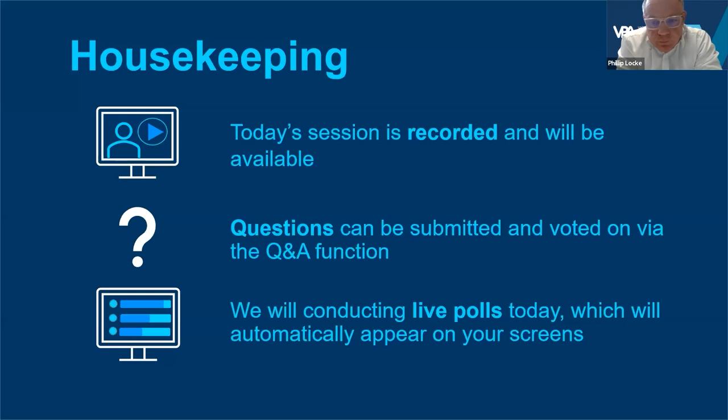The purpose of this webinar is to highlight the most common inquiries and faults relating to box gutter systems that are not being designed in a deemed to satisfy manner. The learning goal for this session is to identify the fundamental requirements for the design and installation of box gutter systems using deemed to satisfy methods.

The learning objectives for this session are for participants to understand the fundamental deemed to satisfy installation requirements for box gutters discharging to a rainhead, box gutters discharging to a sump with a side overflow, and box gutters discharging to a sump with a high capacity overflow. By the end of this session, participants should be able to identify parameters for rainheads and sumps, identify appropriate overflow size and location, and identify correct downpipe sizing and outlet location.

So what will we cover? We'll look at box gutters discharging to a rainhead - starting with grade and design flow, rainhead sizing, overflow, downpipe sizing and outlet location. Then we'll look at the same for sumps discharging from the side overflow: grade, design flow, sump sizing, overflow, and downpipe location.

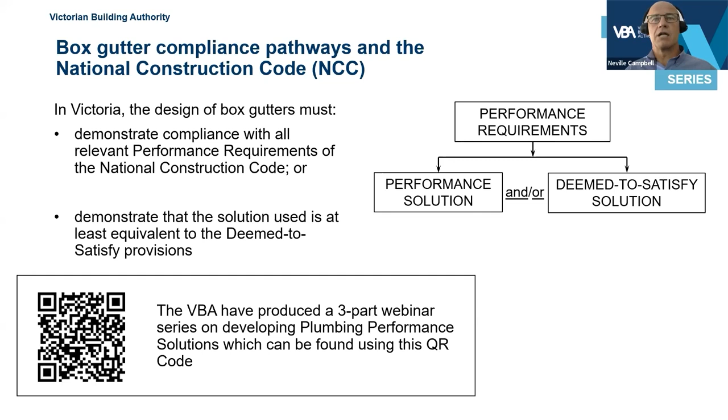In Victoria, provisions of the National Construction Code require building and plumbing practitioners to comply with AS NZS 3500 Part 3 for the deemed to satisfy design of box gutter systems. Alternatively, a performance solution may be developed to demonstrate compliance.

The latest version of the standard was published on the 28th of May 2021. The VBA has applied a transition period until the 1st of May 2023 before it requires the revised standards to be applied in practice, coinciding with the adoption of the 2022 version of the National Construction Code. From the 1st of May 2023, the Victorian variation to Volume 3 of the NCC, Plumbing Code of Australia, will adopt the HB 39 under the Plumbing Code and give precedence to 3500 Part 3 where there is any inconsistency between these two documents.

The box gutter designs in the following presentation are typical of designs prescribed by the general methods of AS NZS 3500 Part 3 2021, and as such, these designs are deemed to satisfy the performance requirements of the Plumbing Code of Australia.

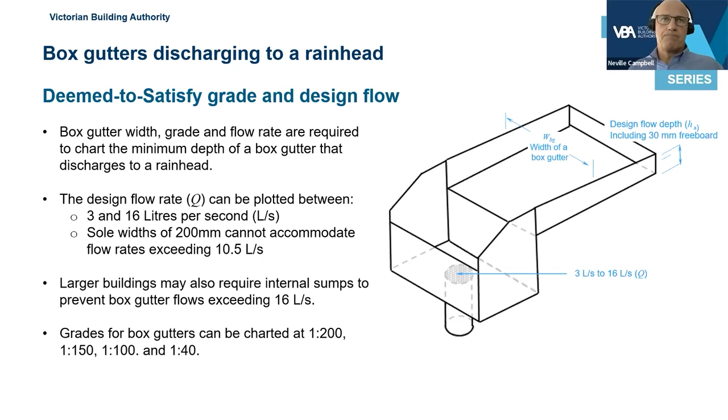Deemed to satisfy rainhead sizing. Minimum depth and length of a rainhead are dependent on the flow rate, the size and shape of the downpipe selected (round, square or rectangle), and the box gutter sole width. The width of the rainhead must be at least equal to the width of the box gutter, so it can be wider, but it must be at least equal.

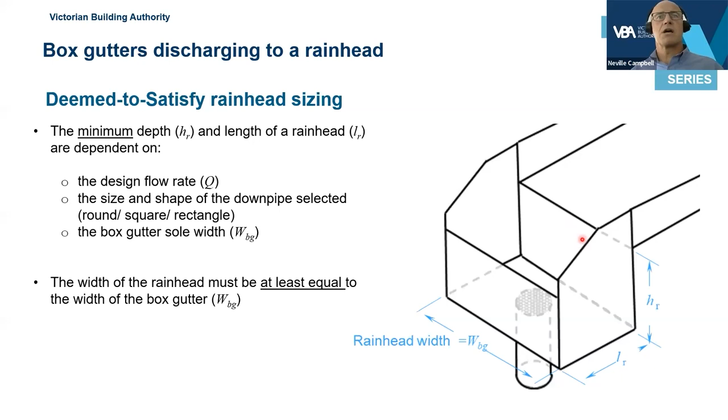Deemed to satisfy rainhead overflow. The weir of the rainhead overflow must be at least 25 millimetres below the sole of the box gutter. The width of the overflow is equal to the width of the rainhead. The rainhead must be left open above the overflow weir. Ned Kelly slots, round holes, vertical chutes or ducts are not deemed to satisfy designs. So you can see here, the sole of the gutter, and the weir of the overflow here, there's a 25 millimetre gap between them. So the overflow height equals HR, the height of the rainhead, minus 25 millimetres. Notice here that it's completely open above the weir of the rainhead.

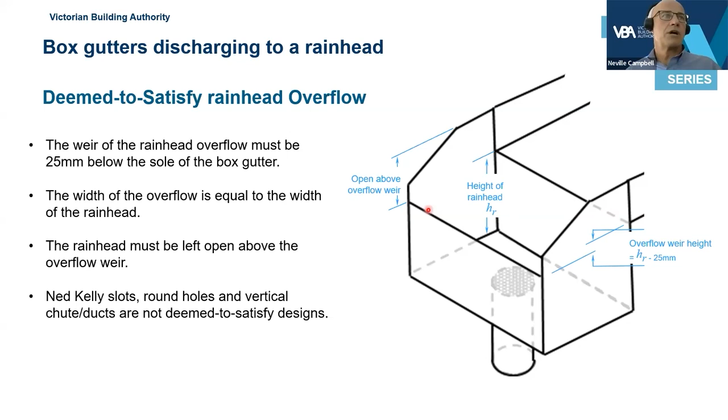Deemed to satisfy downpipe sizing and outlet location. Size and shape of the downpipe is selected when sizing the downpipe. Round downpipes must be fitted so that the centre of the downpipe is not closer than the diameter of the downpipe to the nearest vertical side of the rainhead. Square or rectangle downpipes must be fitted so that the centre of the downpipe is not closer than the average of the two side dimensions of the downpipe from the nearest vertical side of the rainhead. Downpipes must discharge vertically from the sole of the rainhead.

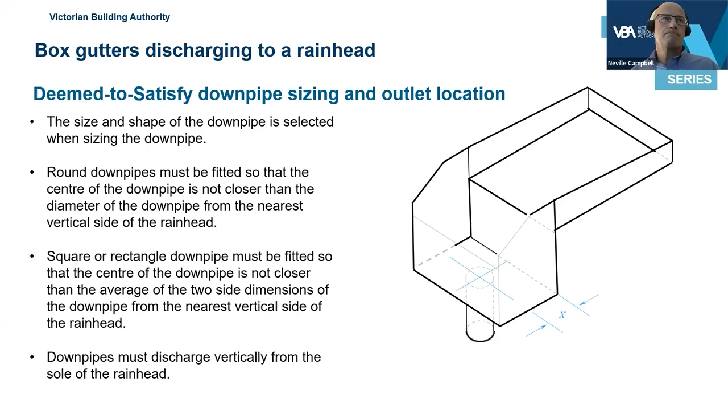Okay, question time.

Choose the one correct answer that relates to deemed to satisfy designs of rainhead overflows. Is it number one, the width of the overflow is equal to the width of the rainhead? Two, the rainhead must be left open above the overflow weir. Three, Ned Kelly slots, round holes, vertical chutes are not deemed to satisfy designs. Or four, all of the above.

Any participants joining in here?

So here we go, we can get some participants. All the above, well done. Overwhelmingly.

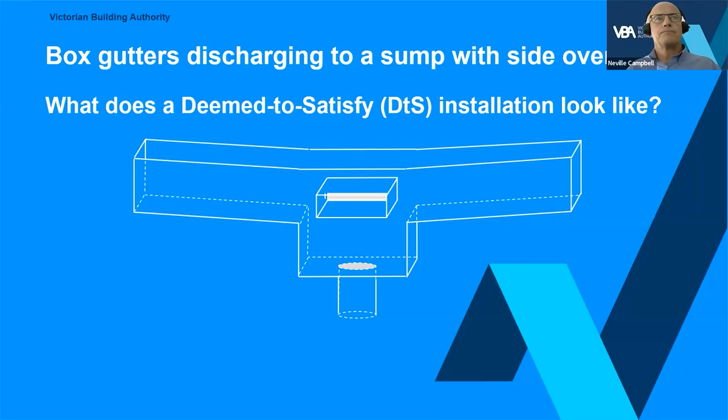Box gutters discharging to a sump with side overflow. So what does the deemed to satisfy installation look like? Deemed to satisfy grade and design flow: just like our box gutter discharging to a rainhead, the flow rate of each box gutter is required to chart the minimum depth of the gutter. The design flow rate can be charted between 3 and 16 litres per second. Sole widths of 200 millimetres cannot accommodate flow rates in excess of 10.5 litres per second. Grades for box gutters can be charted at 1 in 200, 1 in 150, 1 in 100, and 1 in 40.

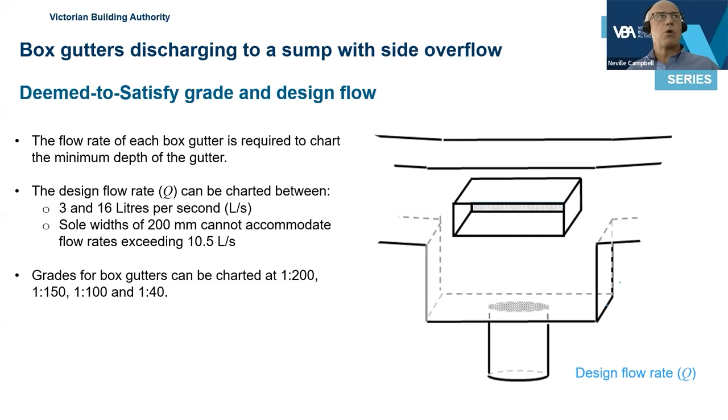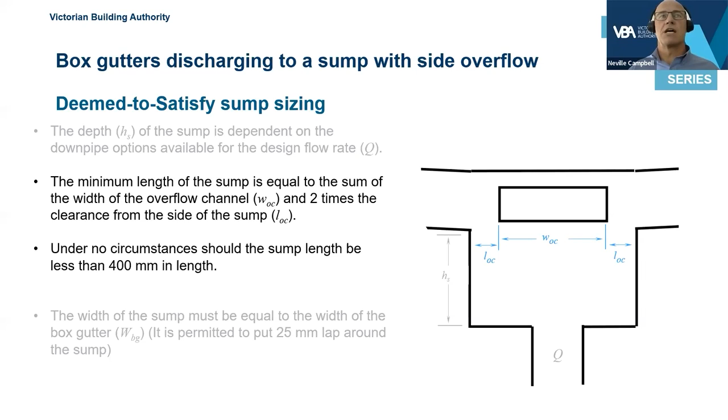So if we're looking here, this width of the overflow channel, which we will touch on in a few slides, is selected from the standard. This, what's known as the loc, which is the clearance from each side of the sump, is also selected from a chart in the standard. So these are not arbitrary numbers; they actually are relative to each other. We'll look at that as we move along.

The width of the sump must be equal to the width of the box gutter. It is permitted to put a 25 mm lap around the sump. So just for clarity's sake, the length of the sump is this way, the width of the sump is this way.

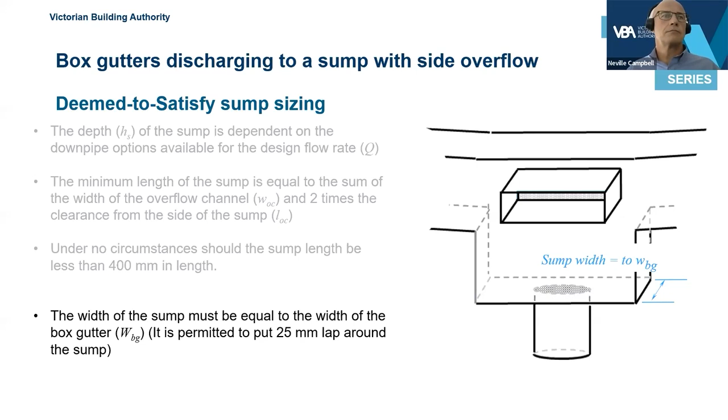Deemed to satisfy overflow: there are three available options for the width of an overflow channel - 200, 300 and 450 millimetres. If wider slots than necessary are used, the sizing should be based on the lower DTS width and the length of the sump adjusted to accommodate the loc. So if you wanted to use, for example, a range plotted from the standard for the width of this overflow channel of 200, 300 or 450 - if you wanted to use a 200 or 275 millimetre slot, you could. That would be oversized, and this is of course a minimum standard. However, you still need to accommodate the loc on either side, which is also charted from the standard, so that would affect the sump length.

Depth of the overflow channel is dependent on the width chosen and the corresponding design flow for the box gutter. Now we're looking at this here, and the design flow Q - that's what gives us the depth of the overflow channel. Vertical position of the overflow, known as the HT, is the minimum height from the top of the gutter to the bottom of the overflow. So it's this height here, top of the gutter, bottom of the overflow.

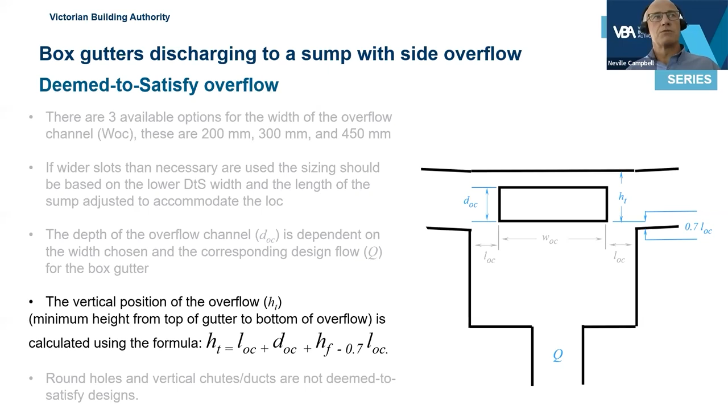The standard does permit the overflow to be moved a little, but we do run into problems if it's moved outside of the sump, obviously because the gutters are on grade, and this minimum height above the sole of the overflow channel then becomes affected when we start to move it along.

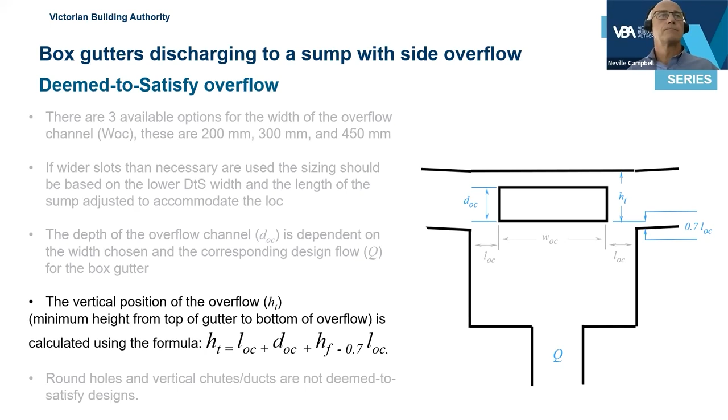Round holes, vertical chutes or ducts are not deemed to satisfy designs. I think that's one that's poorly understood. Really, there's no other arbitrary numbers - they are actually calculated from the standard. So when you start applying things like round holes etc., there is nothing to base that sizing on. It's where you're into performance solution territory.

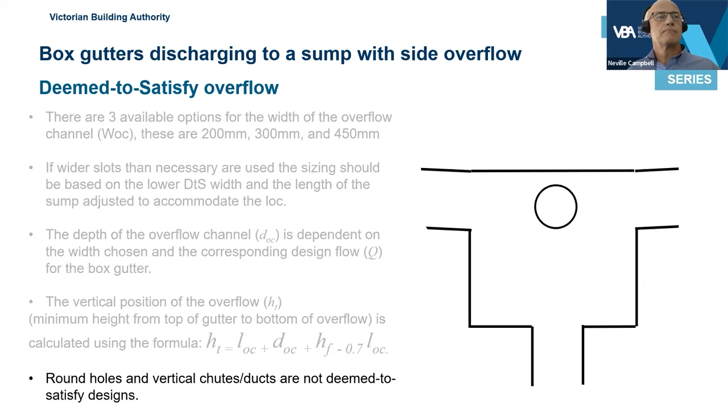Downpipe sizing and outlet location: the available downpipe sizes are dependent on the design flow rate of the box gutter and the corresponding sump depth. Round downpipes must be fitted so that the centre of the downpipe is not closer than the diameter of the downpipe from the nearest vertical side of the sump - this is exactly the same as our rainheads. Square or rectangle downpipes must be fitted so that the centre of the downpipe is not closer than the average of the two side dimensions of the downpipe from the nearest vertical side of the sump. Downpipes must discharge vertically from the sole of the sump - they come out the bottom. We do see them from time to time coming out the side and out the back.

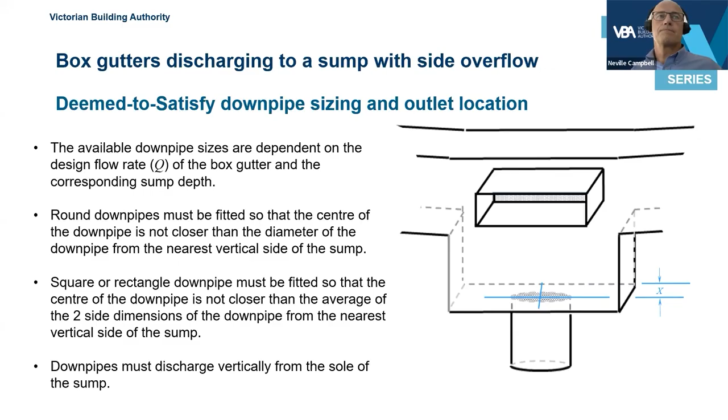Question time again.

Choose the one correct answer that applies to the deemed to satisfy design of sumps and overflows. Is it 1, the overflow can be any width or height? 2, the length of the sump depends on the width of the overflow channel, 2 times the loc. 3, the value of loc is plotted from the standard. Or 4, both 2 and 3.

Where did we go? 83% correct. Excellent.

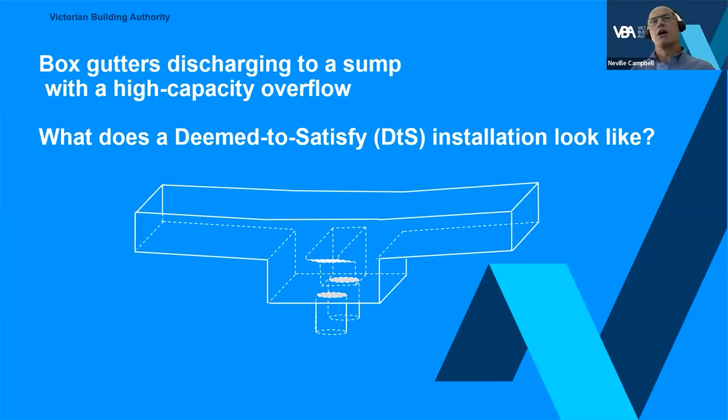Box gutters discharging to a sump with a high capacity overflow. So what does a deemed to satisfy installation look like?

Deemed to satisfy grade and design flow. The flow rate of each box gutter is required to be plotted, and is required to plot the minimum depth of the gutter from the standard AS/NZS 3500.3. Where one gutter receives more catchment than others, the sizing must be based on the largest gutter.

Design flow rate can be plotted between 3 and 16 litres per second, and sole widths of 200 millimetres cannot accommodate flow rates exceeding 10.5 litres per second. Grades for box gutters can be plotted at 1 in 200, 1 in 150, 1 in 100, 1 in 40.

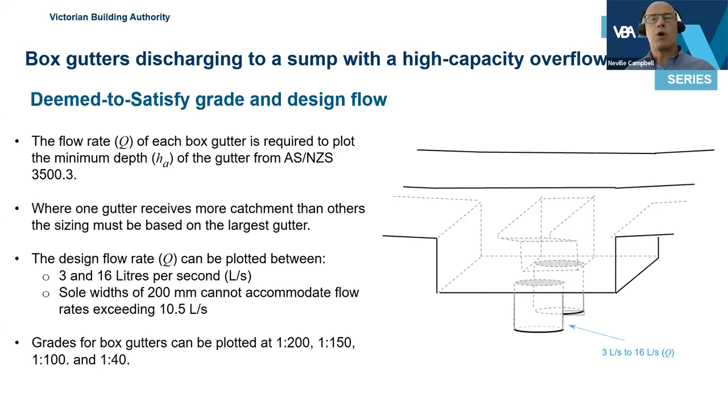Deemed to satisfy sump depth. The depth of the sump with a high capacity overflow is dependent on the plotted overflow weir height, known as the lock, the datum level from where the sump depth is measured.

So this is our sump depth here. There is, of course, also a datum zone. And that datum zone, which we'll look at next, can be anywhere in here from the sole to 60 mil below.

Datum level is equal to the sole. Datum level is equal to the sole of the box gutter. Value of lock is greater than 60 millimetres, or below the sole of the gutter, value of lock is less than 60 millimetres. That will depend on the plotted size of the lock.

Notice with high capacities, it's different to some side overflows. With side overflows, the lock is actually a distance from the edge of the sump to the overflow. With the high capacities, the lock is actually the distance between the sole of the gutter at the sump and the overflow weir height. So it's this distance here.

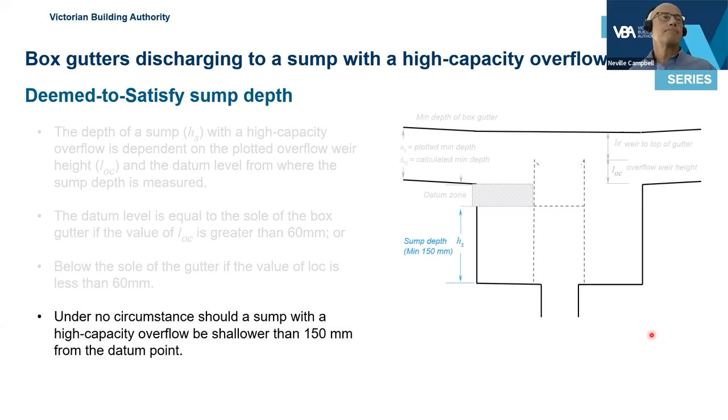Deemed to satisfy sump length. Primary sumps incorporating a high capacity overflow must be 600 millimetres in length. This includes a 200 millimetre secondary sump and a 200 millimetre space either side of the secondary sump.

So this is our primary sump. We're looking at here, this is the length of the sump. Sump length equals 600 mil. This is our secondary sump, which is our overflow device. It's 200 millimetres wide. You'll notice there's a 200 millimetre space either side. Gives us a total length of 600 millimetres.

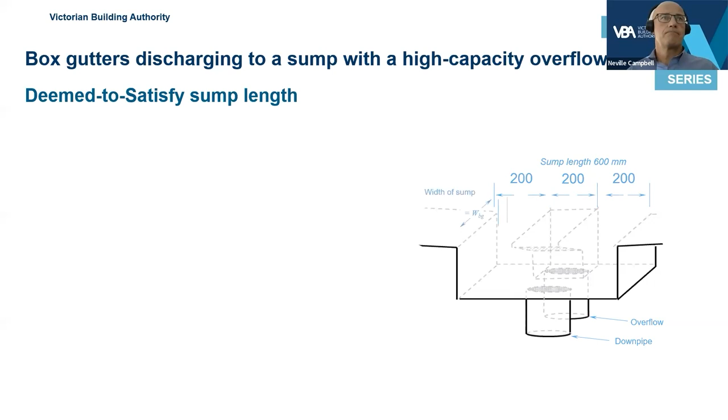The width of the primary sump is the same as the box gutter. So just to reiterate, this is the width and this is the length. That's right.

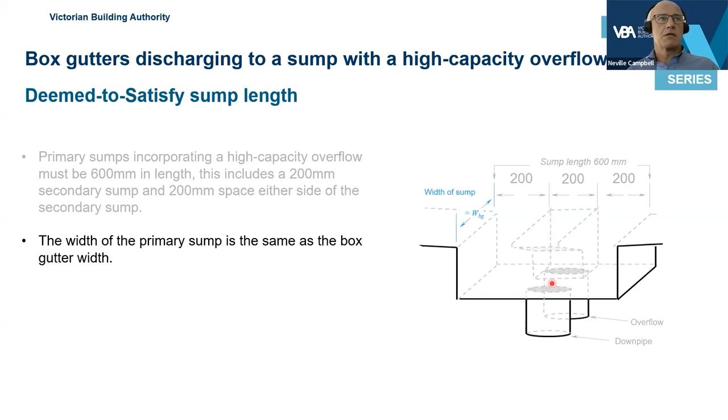Deemed to satisfy overflow for a secondary sump. Standard requires the upstream sole of the secondary sump to be 40 millimetres, and the downstream sole to be 60 millimetres. 40 millimetres here, 60 millimetres here.

The weir must be the full width of the primary sump. Here on the side.

The height of the weir above the gutter sole must be plotted from the standard as required by the general method. So that's known as the lock. It's this height here, the height of the overflow weir above the gutter sole that is plotted from the standards. Height of the sump, the rest of it, from the bottom of the sump to the sole of the gutter, will depend on the size of the sump.

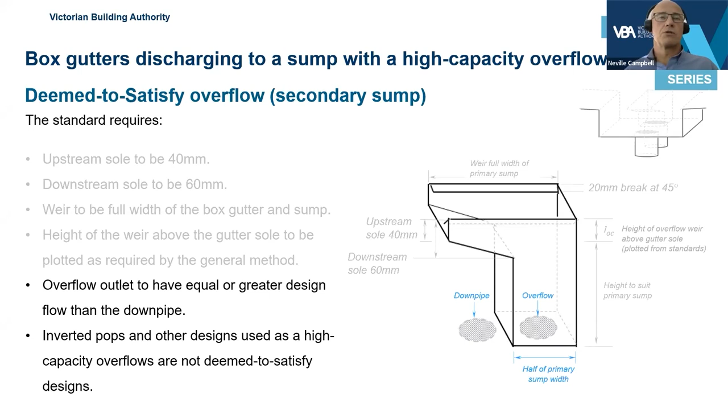The overflow outlet must have an equal or greater design flow than the downpipe. Inverted pops and other designs used as high capacity overflows are not deemed to satisfy designs. They may work and may be justified through a performance solution, but they are not deemed to satisfy design.

Deemed to satisfy downpipe sizing and outlet location: the downpipe must be sized for the total design flow through the outlet, and the downpipe and overflow must discharge vertically from the sole of the sump.

The overflow outlet must be positioned on the centre line inside the secondary sump. You can see here, this is our overflow outlet, this is our overflow sump, and this is the top of the overflow sump. Looking down in plan view, the downpipe is obstructed because it's covered by the sole of the secondary sump.

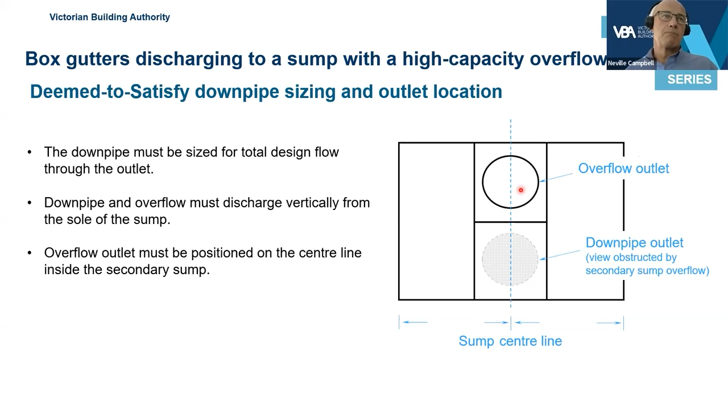The downpipe outlet may be moved longitudinally to allow maintenance access, but must not cross the centre line of the sump. So it can be moved this way, no problem, or the other way, but it can't be moved across that centre line.

The downpipe centre must not be closer to the edge of the sump than the diameter of the outlet - that's for round, or if square, the average of the two sides. So that's this distance here, from the centre of the outlet to the edge of the sump, or this way. It shouldn't be closer than the diameter of the round, or the average of the two sides of the square or rectangle.

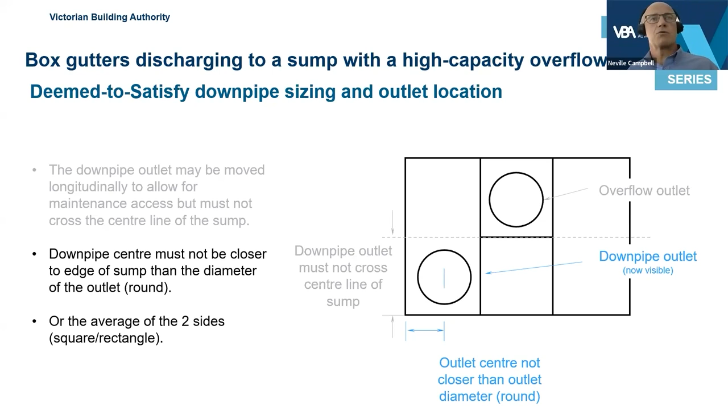Okay, question time. Choose the correct answer that applies to the deemed to satisfy design of sumps with a high capacity overflow. 1, the overflow can be an inverted pot. 2, the overflow just needs to be higher than the sump. 3, there is only one deemed to satisfy design for a sump with high capacity overflow. Give that a minute for people to answer.

Excellent, 90% correct. Unfortunately, that question is a little misleading in that there is only one deemed to satisfy design. The designs will, of course, vary depending on the depth of the sump and the width of the box gutter. But the rest of it - the length, the overflow, all that stuff - is still a requirement of the standards. It's plotted that way for a deemed to satisfy design.

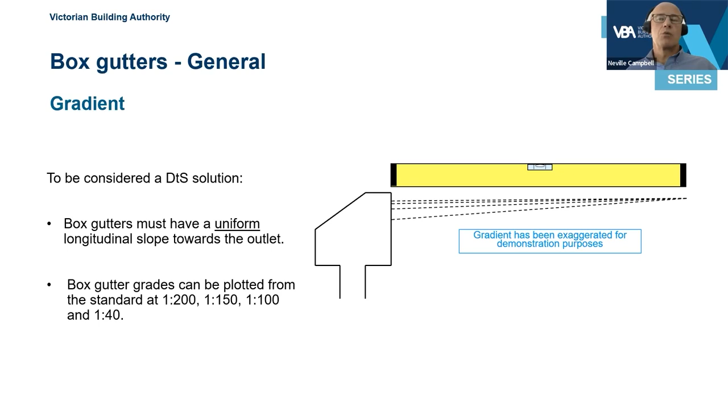Box gutter grades can be plotted from the standard at 1 in 200, 1 in 150, 1 in 100, 1 in 40. To be considered a DTS solution, box gutter sole widths can be plotted from the standard: 200, 300, 375, 450, 525, and 600 millimetres.

Sizes between the minimum and maximum can be used if they are sized to the lower DTS. Gutters passing through a parapet must not reduce below the minimum design width and depth of the gutter. The sole of the gutter can taper towards the outlet if there is a proportional increase in depth and the sole width is not reduced below the minimum design width.

In practice, if we're passing a box gutter through this parapet and the design worked out the gutter width to be 200 millimetres, it shouldn't be less than that passing through the parapet. So if you wanted to use a tapered gutter, you could start at 300 mil or wider and taper it down to 200, which is the sole width you're basing the sizing on, but you would need a proportional increase in depth as you pass through.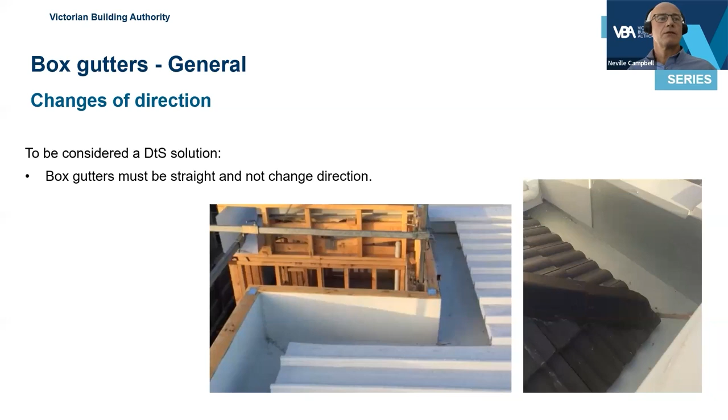To be considered a DTS solution, box gutters must discharge to a sump or a rainhead at the downstream end without changing direction. So side chutes, three-sided sumps and pops in the sole of a box gutter are non-DTS designs. They may possibly be demonstrated to work through a performance solution, but they're not a deemed to satisfy design. The standards are quite clear - the box gutter must discharge at the downstream end and be straight.

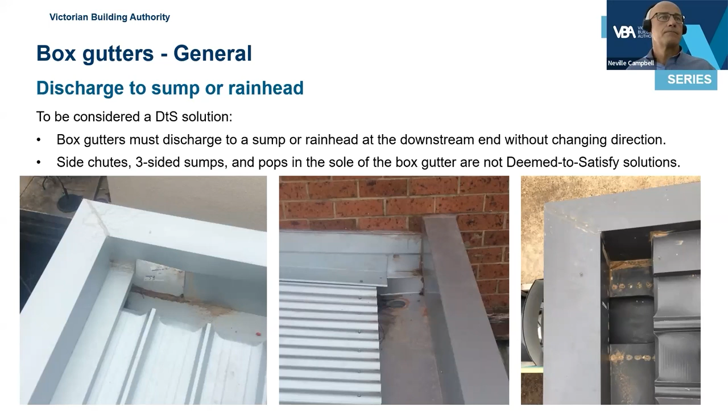Inverted pops, Ned Kelly slots, round holes are not deemed to satisfy designs. This doesn't mean their compliance can't be demonstrated by a performance solution - it's possible that it can. It would depend on the paperwork and the testing or whatever verification methods you've used to justify it.

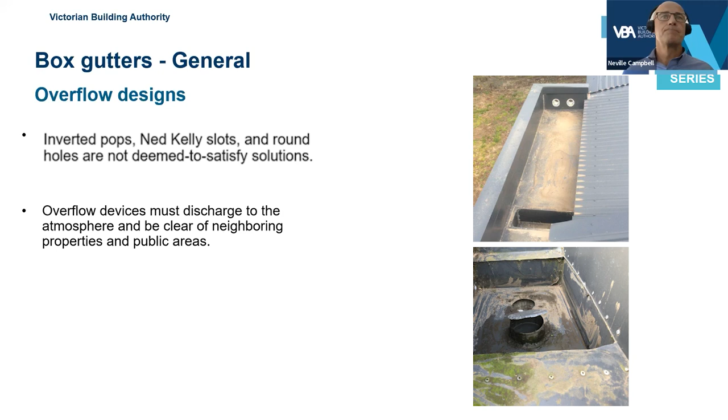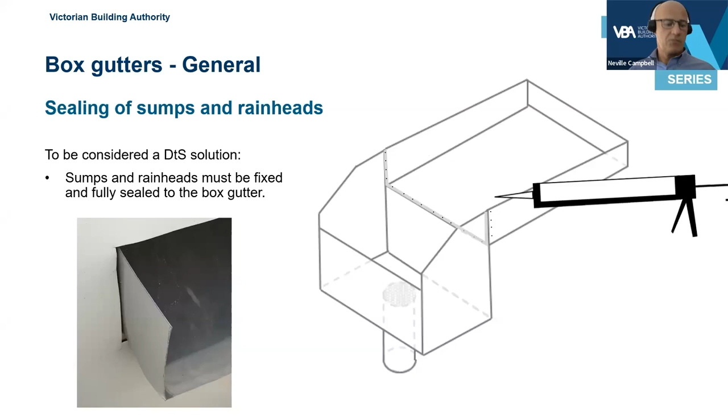Sealing of sumps and rainheads. So sumps and rainheads, to be considered a DTS solution, must be fixed and fully sealed to the box gutter. Fairly straightforward, that one, but unfortunately it is passed over a lot.

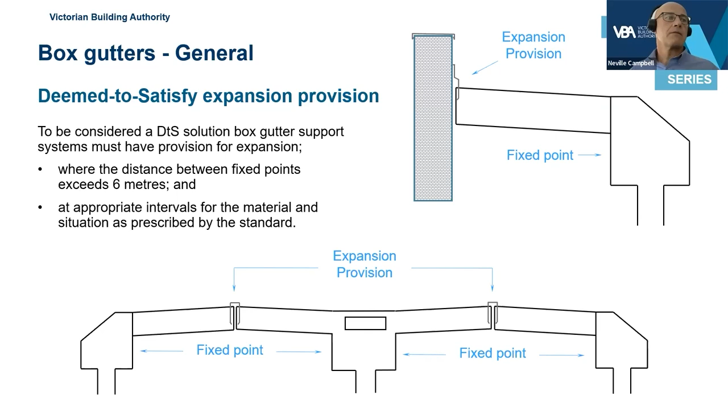To be considered a DTS solution, box gutter support systems must be able to support the weight of the gutter and sumps when full of water, as well as the trafficable load at any point in the gutters and sumps. They must be supported by a compatible material, or shielded from incompatible support material with a non-abrasive, impervious and non-conducting material. The sides of the box gutters must have enough structural strength so that the water pressure cannot cause deformation. Look at this one here.

The other common issue we see is particle board flooring used to support the box gutter. Some particle board flooring contains formaldehyde, and formaldehyde reacts with metal - that's what makes it quite corrosive. That's where our shielding comes in.

In addition, another thing we commonly see is particle board flooring and trimmers used to support the box gutter. They might run trimmers down the side and then nail particle board flooring up from underneath. Particle board flooring, in that scenario, isn't actually supported, so it's not being used as a support mechanism. It's actually just being suspended by the runners.

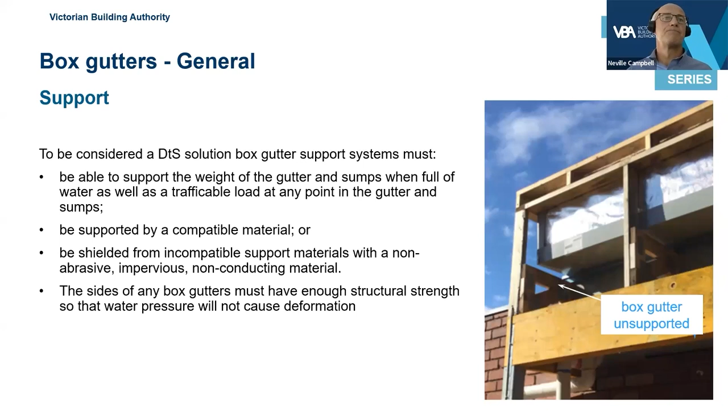For the purpose of sizing box gutters, sumps and rainheads, a box gutter is all the box gutter that discharges to a sump or a rainhead. For a rainhead, this might be a straight length. For a sump, the discharge could come from two opposing sides.

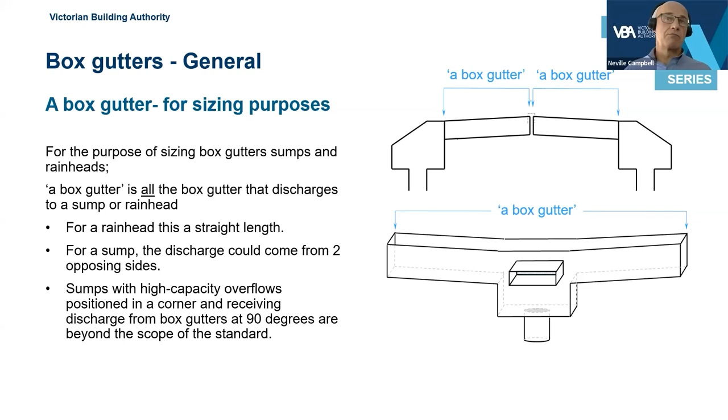If you don't have your rainhead set up the way that we've described previously - of course, there's nothing wrong with having a box gutter, a sump in a corner, and perhaps having one gutter fall to it and one away from it.

Conflict between standards. The primary standard for deemed-to-satisfy box gutter design is AS/NZS 3500 Part 3. HB 39 is also a primary standard - it's actually a handbook, a primary reference document, and provides the installation requirements for box gutters. In some circumstances, information in HB 39 is inconsistent with the requirements set out in 3500 Part 3. In these situations, the requirements of 3500 Part 3 should be applied.

An example of conflict between standards is box gutter minimum depth. HB 39 says that for commercial or industrial installations, box gutters can have a minimum size of 300mm sole and 75mm deep at the high end. It also says the minimum size for domestic installation would be 200mm wide and 75mm deep at the high end, commensurate to the roof catchment area served by the gutter.

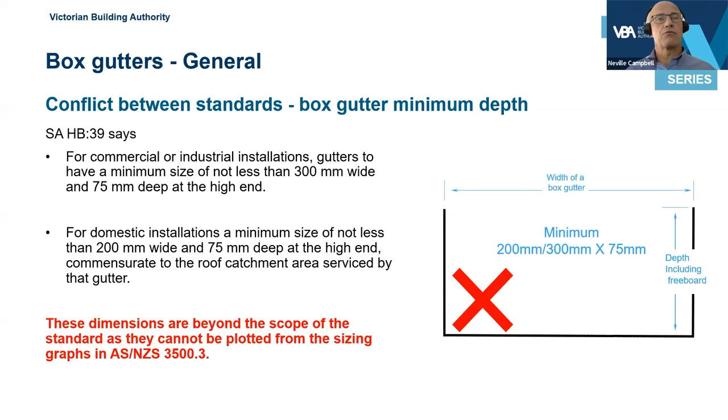Now, these dimensions are beyond the scope of the standard, as they cannot be plotted from the sizing graphs of AS/NZS 3500 Part 3, and I'll show you why as we move through the slides.

So here we have a table that shows the minimum depth for a minimum flow rate. This is the absolute minimum for a box gutter size. If we look here, we can see 200mm width of the box gutter at the minimum flow rate, which can be plotted from the standard, which is 3 litres per second. You would never size in a DTS manner to anything less than 3 litres per second.

At a maximum slope, we're looking at 93mm deep. For a 300mm wide gutter, even at a maximum slope, again at 3 litres per second, we're still looking at 85mm deep. So neither of those could ever actually be plotted at 75mm.

For a box gutter to be 75mm deep at a minimum flow rate of 3 litres per second, we're looking at a 600mm gutter at grade of 1 in 40. So it's actually quite a difference.

Now, I know there will be people who say that's not correct, but my numbers here don't work out. Just pay attention to this down here. When you're using standards to chart the depth, there are slight variations due to parallax error, the position of your line, the thickness of the axis line, the ruler you use. If you're within a few millimetres either side, I would say you're probably on par with the requirements.

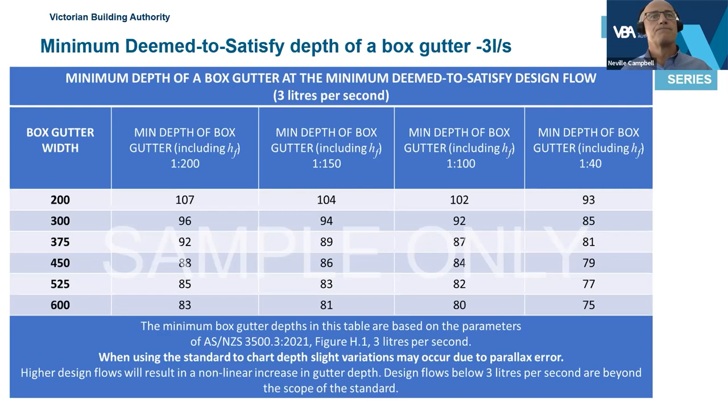Looking at the other end, this table is for the minimum depth of a box gutter for a maximum flow rate. So we're looking at minimum depths of box gutters at 16 litres per second.

You'll note here, first thing you'll notice is for a 200mm gutter, it's not an option at any grade at all, at 16 litres per second. The reason for that is that the axis line for a 200mm gutter peaks at 10.5 litres per second, which you would have heard me repeat a few times throughout this presentation.

These tables are a minimum standard. That doesn't mean you can't use a wider gutter.

So, for example, if you're going to use a 350mm gutter, you would base your sizing on the 300mm.

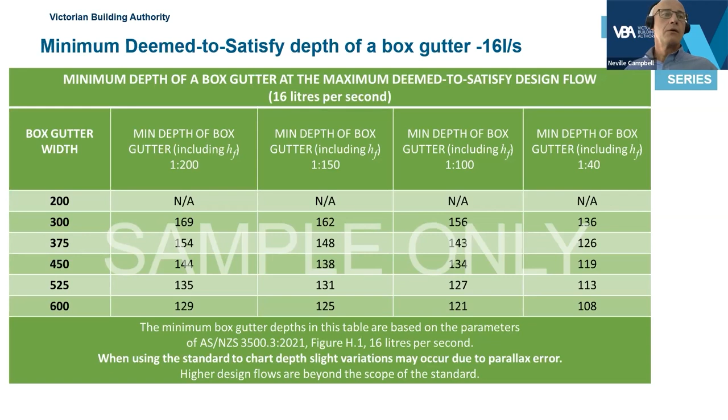This is an example of conflict within a single standard. The AS/NZS 3500 Part 3 says that a 100 by 50mm rectangle downpipe may be used for the connection of a sump or rainhead. Downpipes of this dimension are not an available option that can be plotted from the sizing graphs of 3500 Part 3.

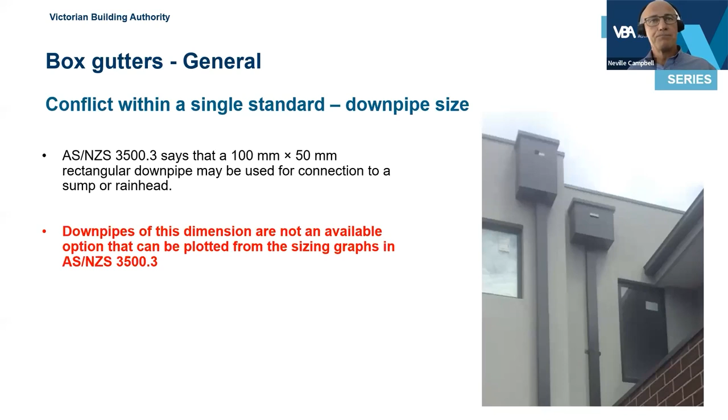Question time. Choose the correct answer that applies to the minimum deemed to satisfy depths of a box gutter. One, a box gutter can be 200 by 75mm for domestic and 300 by 75 for commercial. Two, the minimum depth must be plotted from the design graphs in the standard using design flow, sole width, and grade.

How did we go? Excellent, 91%. Minimum depth must be plotted from the standard. Moving on.

That brings us to our conclusion. We've looked at deemed to satisfy design parameters for rainheads and sumps, rainhead and sump sizing, overflow size and location, and downpipe sizing and outlet location. Participants should now be able to identify sizing parameters for rainheads and sumps, identify appropriate overflow size and location, and identify correct downpipe sizing and location.